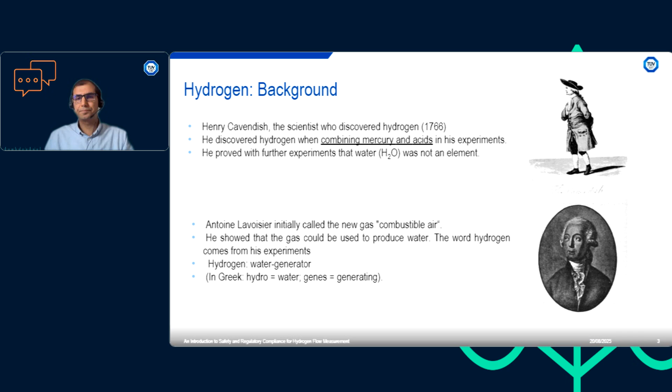So let's start and look at hydrogen properties, because it's really important to know the properties of hydrogen if we want to focus on its safety. Hydrogen is very similar to other small hydrocarbons like methane, butane, and propane. So all of these types of gas are combustible, they are odorless, they are non-toxic, and they are non-metallic.

When we come to safety concerns, all these types of gas cannot be detected by human senses. For example, if there is a leakage of hydrogen, we cannot smell it, as well as the leakage of methane, butane, or propane. The only thing is that with other types of gas, such as natural gas or methane or propane, they can easily add odorant to them. With hydrogen, it's actually difficult to add an odorant because hydrogen is very light and the odorant can get separated from the gas. So finding an odorant that can work with hydrogen is difficult.

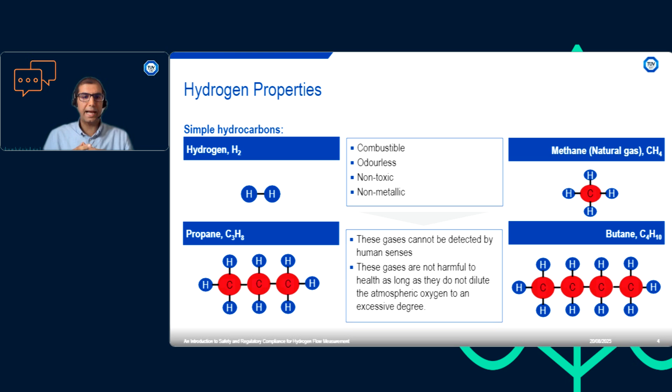And also these gases are not harmful to health as long as they don't dilute the oxygen in the atmosphere to a dangerous low level. Hydrogen is the smallest molecule in the universe. It has a very low viscosity. So because it has a low viscosity, it has a high leakage rate. So a system that is tight enough for other types of gas, such as natural gas, might not necessarily be tight enough for hydrogen.

So it is very important to test such a system with small atoms or a small molecule, something like helium. And hydrogen has a strong tendency to diffusion because of the small size of the molecule. So does it mean that we cannot store hydrogen? Well, that's not the case. We've been storing hydrogen for over 100 years. Normally some hydrogen diffuses through the walls of the storage system, but because the diffusion is insignificant, we don't lose that much hydrogen, and also outside of the boundaries of the system, the hydrogen is not to a concentration that can make an explosive mixture.

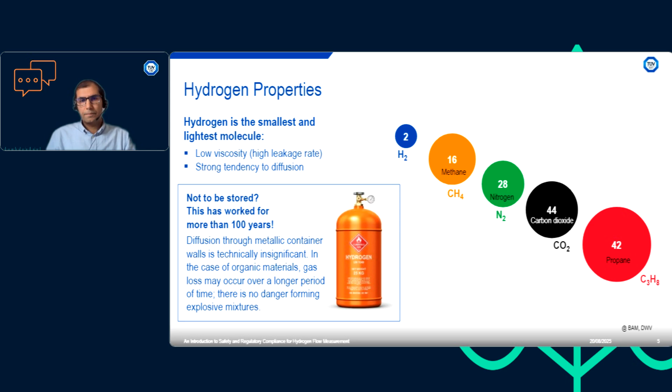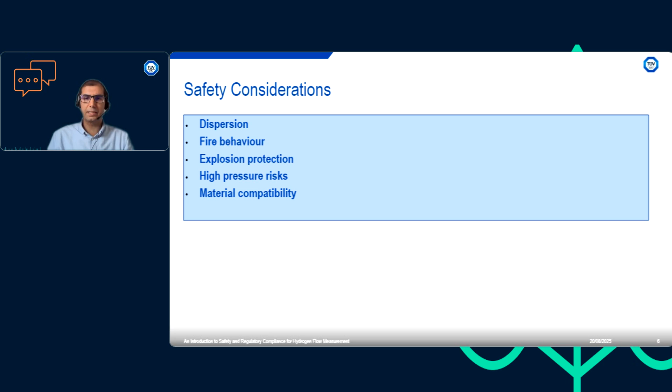Okay, let's move on to the safety considerations and some other behavior of hydrogen. So I will cover dispersion, fire behavior, explosion protection, high pressure risk, and material compatibility in the next section. The first question maybe is hydrogen explosive? Well, I can say yes and no. On its own, hydrogen is not categorized as an explosive substance because its molecules are stable.

But hydrogen, when it comes in contact with an oxidant, like the oxygen in the atmosphere, can make an explosive mixture. So this is the triangle of explosion or fire. We need to have three elements for a fire or an explosion to happen. We need the flammable gas, which is hydrogen. We need oxygen, and we need ignition energy. So even if one or two of these elements don't exist, there will be no explosion or no fire.

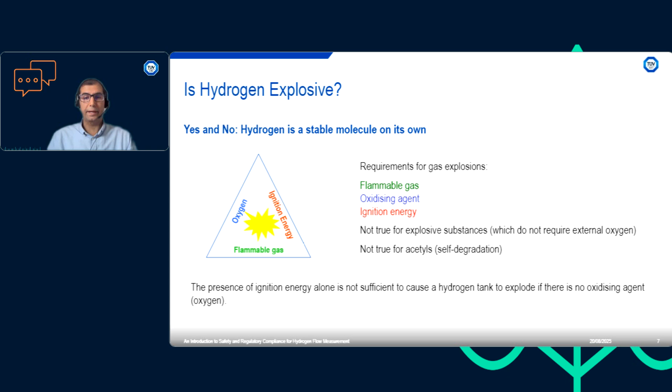So based on that concept, we can have measures in place to prevent any fire or any explosion. Protective measures normally are categorized under these three different levels: primary explosion protection, secondary explosion protection, and tertiary or constructive explosion protection. At the level of primary explosion protection, we normally try to prevent the formation of any explosive mixture. So examples of that are proper ventilation in your workplace, inerting of the system, and gas warning devices that should be in place. So that's the first step.

We always want to make sure that there is no leakage, there is no possibility of an explosive mixture to be formed, and if there is one, put proper measures to prevent the hydrogen from getting trapped there and reaching concentrations that are dangerous. So ventilation is actually very important for hydrogen. I will cover that more in the next slide.

Secondary explosion protection is the next step. That's when we make sure to avoid any ignition coming in contact with the possible explosive mixture that can be formed in our workplace. Examples of that are the classification of zones, ATEX devices, and lightning protection. So if you work in an environment where there is a possibility of the formation of an explosive mixture, you need to have those measures in place.

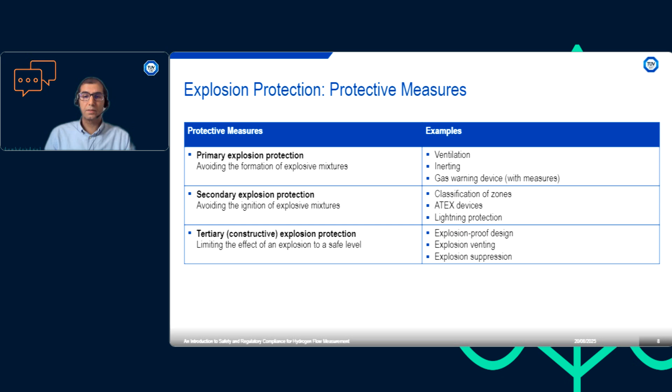And then finally, tertiary or constructive explosion protection is when we try to minimize the effect of a possible explosion. That can be explosion-proof design of the system, explosion venting, and explosion suppression. So in case there will be an explosion or fire, we want to minimize this damage. So that's basically the last step.

So let's take a look at hydrogen dispersion behavior. Ventilation is very important for hydrogen. I can say even more important than other types of flammable gas. Why? Because hydrogen is lighter than air. When you have a leakage of hydrogen in open air, it quickly rises and just escapes from the space around the leakage point because it's lighter than air.

So if we are in a confined area, the hydrogen that has leaked quickly rises and accumulates under the ceiling, and then if it has time, it diffuses downwards and makes a very dangerous atmosphere there. So if you have proper ventilation, it is very likely that hydrogen escapes easily.

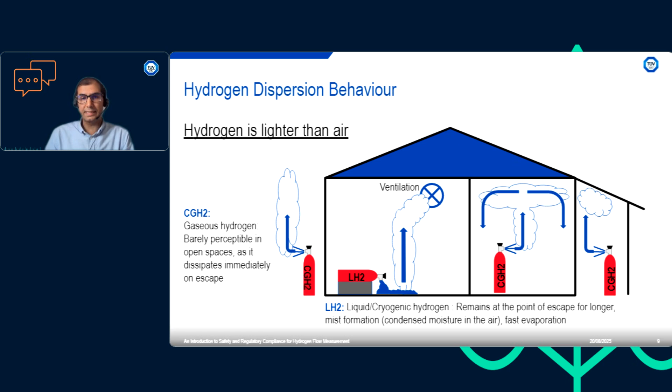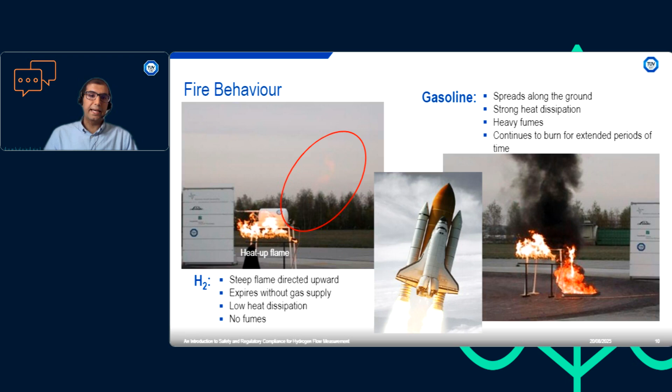So you can imagine that when we have a flame that cannot be seen, is hard to feel, and has no fumes that you can see, there are basically not many signs that you can see or feel that there is a flame in your environment. It can create a very dangerous environment because you can unintentionally get too close to the fire without knowing. So the flame is basically there in this red area.

Other characteristics of the fire behavior by hydrogen is maximum flame speed, which is approximately 8 times as hydrocarbon-based gases. So it means that if there is a fire, it spreads way faster, and then that increases the risk of detonation. That can cause chain reaction. So it can cause a rise in pressure and temperature over a wide area.

As I mentioned, it's barely visible and it has a low heat dissipation. That means we need to have proper flame detection instruments in place. So hydrogen flames cannot be seen, but they have higher levels of ultraviolet radiation. So what that means is that we can use ultraviolet imaging cameras, we can use thermal cameras, or we can use water mist to detect a hydrogen flame.

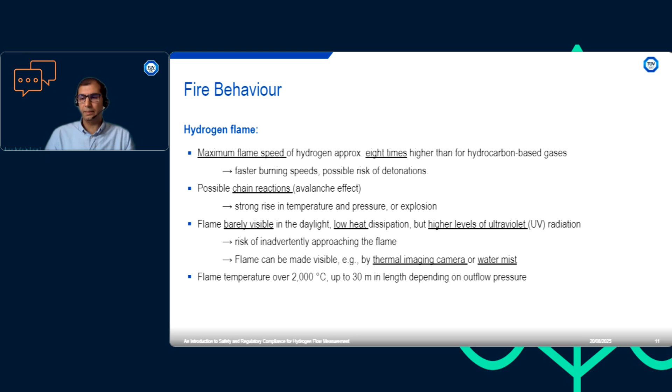I talked about its radiation being low. Does that mean that the flame is less dangerous than other types of flame? That's not the case. The flame temperature can go up to 2000 degrees Celsius, and the height can go up to 30 meters. So it is not less dangerous than any other type of flame.

So this is a picture of thermal imaging cameras, as you can see. On the right-hand side, we have a propane flame, and on the left side, hydrogen flame. So they can easily detect the flame.

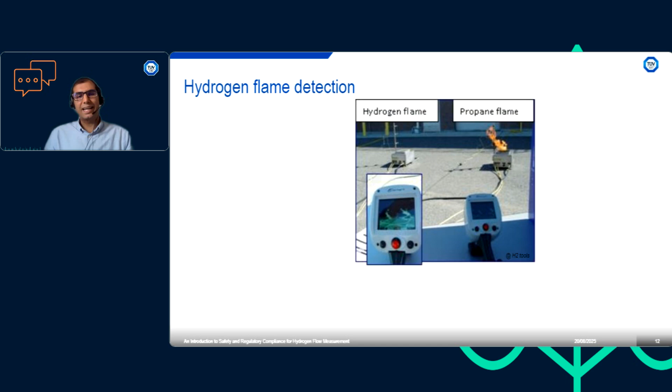Another way that you can use, and it has been mentioned in the ISO standard, is just using a straw broom. As you can see, it has even been mentioned in the international standard ISO 15916. So basically, if you suspect that there is fire in a place, what you can do is to just hold something like a straw broom in front of yourself, and then if it catches fire, that means there is fire there.

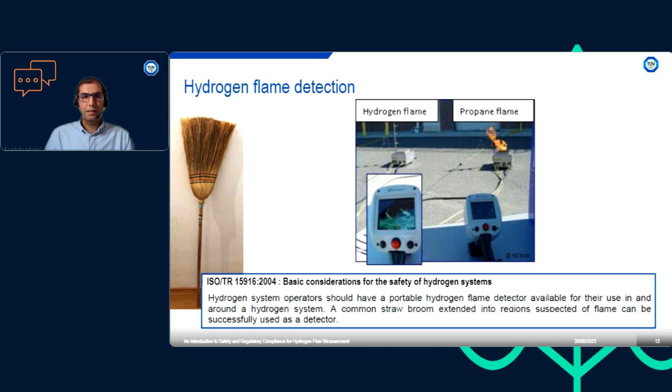The next slide is about the ignition limits of hydrogen and its comparison with methane and propane. The vertical axis is the ignition energy required, and the horizontal one is fuel concentration. We have an LEL, or lower explosion limit, and we have an upper explosion limit, or UEL. As you can see, the envelope for hydrogen is pretty large, while the envelopes for methane and propane are way smaller. However, the LEL for all of them is pretty similar.

So does that make hydrogen way more dangerous because its UEL is much higher than the other two types of gas? Well, that's not the case. Let me explain this for people who might not be familiar with this envelope. Inside this envelope is where a fire or an explosion can happen.

The LEL is basically the first point that we get to when we have a leakage of a flammable gas. For hydrogen, from 4% up to 75% hydrogen in the atmosphere, we can have a fire. For methane and propane, the LEL is very comparable. So because when there is a leakage we first get to the LEL, it doesn't really matter that the range is larger for hydrogen.

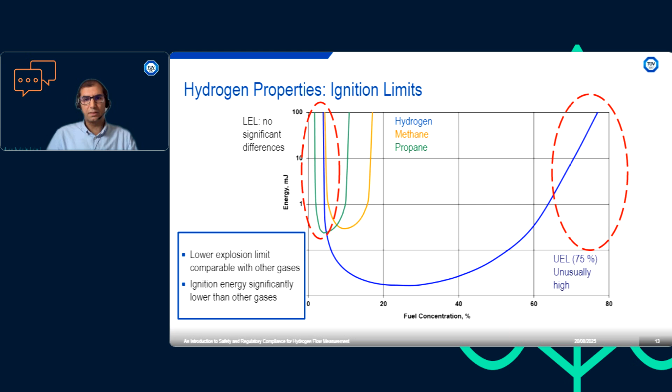Another characteristic of hydrogen, which is very different from these types of gas, is its Joule-Thomson effect. Hydrogen has a negative Joule-Thomson effect. What does that mean? For a gas like methane, or most types of gas, when we have a sudden expansion, the temperature of the gas drops. For hydrogen, around room temperature, it's actually the opposite.

So if there is a release of hydrogen and its pressure suddenly drops, its temperature actually rises. As an example, if its pressure drops from 200 bar to 1 bar, its temperature from room temperature can go up by 6 Kelvin. And this is not linear. So if the pressure drops from 700 bar to 1 bar, the temperature can rise over 50 Kelvin, which can be pretty dangerous.

The next slide shows a comparison between vapor pressure of hydrogen and methane, butane, and propane. As you can see, hydrogen has a small vapor pressure curve, and its critical point is below 50 Kelvin temperature. What that means is that it is not possible to liquefy hydrogen just by applying pressure at room temperature. So it is not liquefiable under pressure at room temperature.

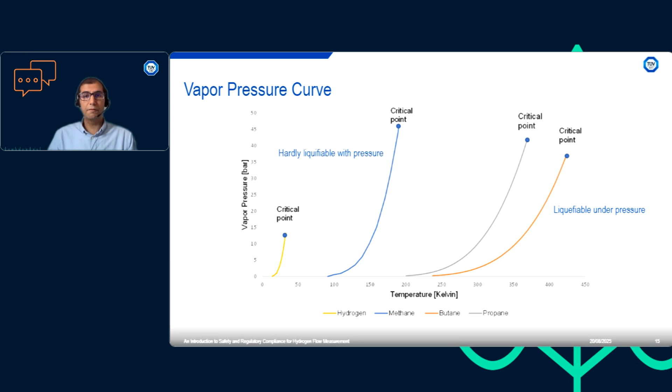So we need a very low temperature for hydrogen to make it liquid, and basically that's the only way that we can make it liquid. So we have to reduce its temperature to a very low temperature, which is, I think, minus 253 degrees Celsius. Yeah. So this is like a comparison between the boiling point of hydrogen and some other substances. So as you can see, hydrogen is even lower than oxygen and methane, and we need to get to that temperature to have liquid hydrogen.

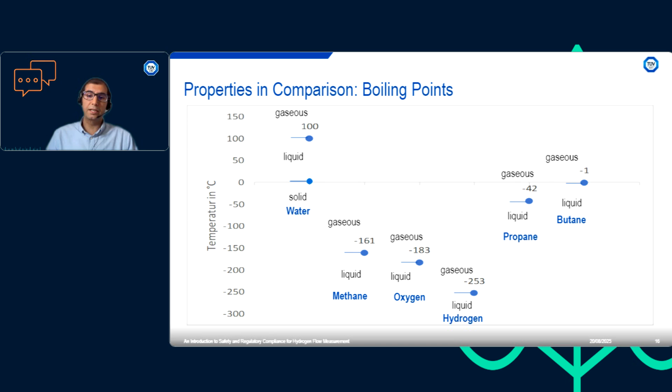So dealing with liquid hydrogen can be dangerous in terms of getting frostbite. So you should be careful with that and have enough safety measures in place if you are dealing with liquid hydrogen.

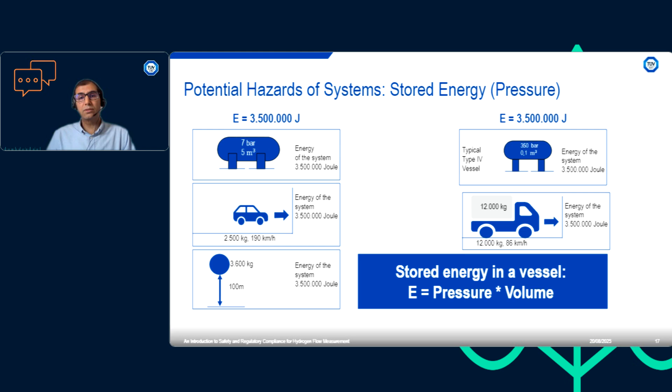Another safety concern with hydrogen is hydrogen embrittlement of materials. Hydrogen can cause embrittlement in 2 different ways. So the first way that it can cause it is when we are dealing with liquid hydrogen. Because it has such a low temperature, basically that temperature reduces the ductility of any material that comes in contact with that hydrogen. And then it can increase the risk of cracking and the failure of the material.

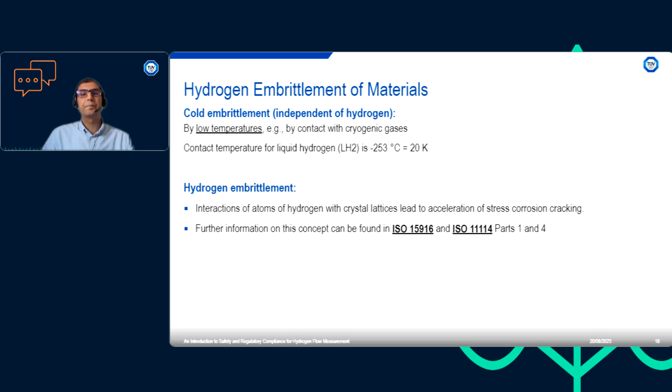So let's look at the mechanisms of hydrogen embrittlement. Hydrogen has two different faces. It has a molecular phase and it has an atomic or ionic phase. When hydrogen is in the form of molecules, it's basically uncritical. It doesn't do that much damage to any system. But when these molecules come in contact with the surface or the boundaries of the system, because of those interactions with the surface, the molecules can split into two ions. And these ions, because they are very small, can easily diffuse into the structure of the material.

So when they diffuse into the structure of the material, they can go between the atoms of the metal and then reduce the cohesion between metal atoms. That will cause ductility reduction in the metal, and then finally it can cause cracking in the metal and the material will fail quicker. So if you are using a system with hydrogen, it is more likely that your system or your system components fail quicker than if you are using the same system with, for example, natural gas.

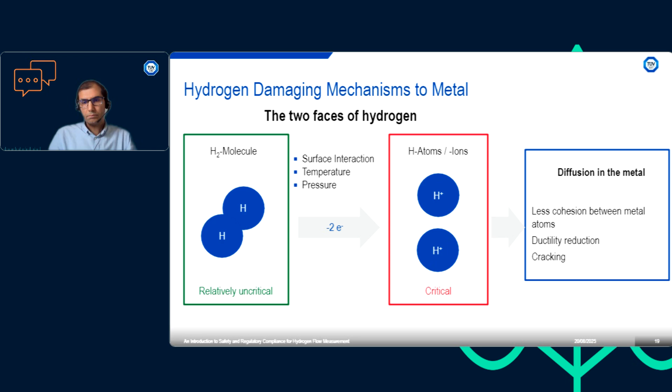So what is the effect of pressure and temperature on hydrogen embrittlement? Basically, if we have a higher pressure, we will have a higher hydrogen diffusion rate. So basically, it means more hydrogen will diffuse into the structure of the material and will cause more problems. So if your system works at a higher pressure, there is more risk of hydrogen embrittlement. For temperature, it is not as straightforward as that.

So at very low temperatures, materials have low ductility, so that increases the risk of embrittlement. But at the same time, because the temperature is low, hydrogen diffusion slows down as well. So that somehow balances the reduction in ductility.

At room temperature to moderate temperature, such as 300 degrees Celsius, that's the most dangerous range, basically, because hydrogen can diffuse very well at that temperature, and the ductility of the material is not as high as at higher temperatures. So that's the most dangerous zone for hydrogen embrittlement. And then at high temperatures, because the ductility of the material is higher, there is a lower risk. And also the hydrogen that diffuses into the structure of the material can escape easily.

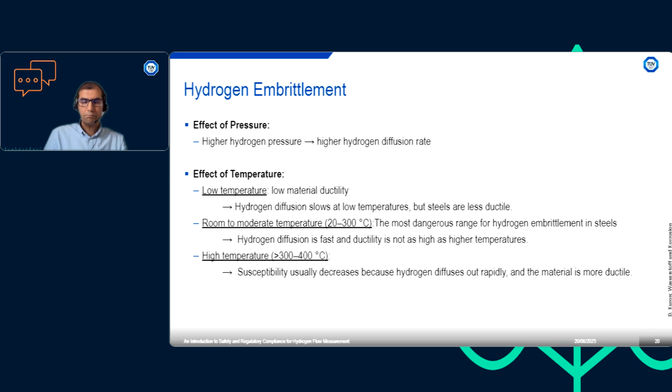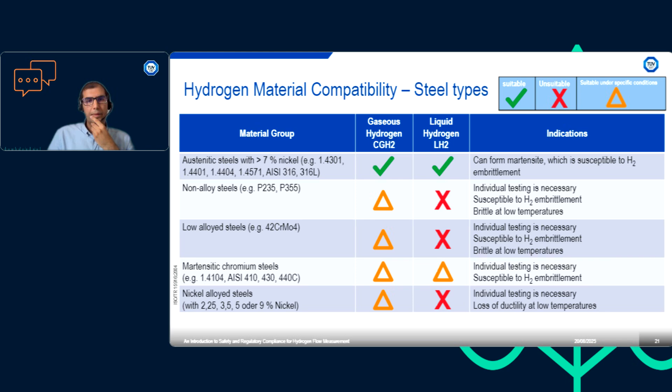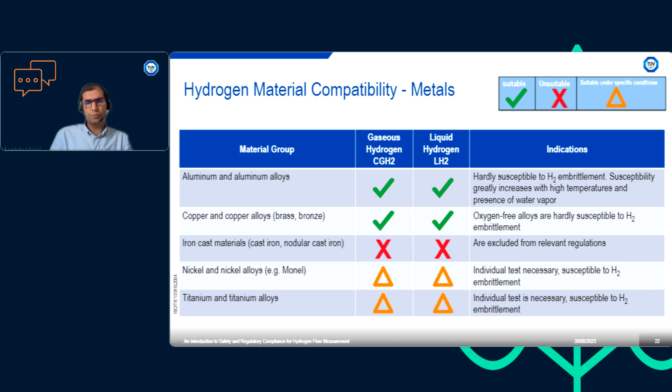So you can refer to this standard if you want to check different types of steel and whether they are suitable to be used with CGH2, compressed gaseous hydrogen, or liquid hydrogen LH2. And then also you can check different metals in the same standard. So as you can see, for example, aluminium and copper and their alloys are normally suitable to be used with hydrogen.

The other damage mechanism of hydrogen is high temperature hydrogen attack, or HTHA. This damage mechanism happens to just steel and happens at high temperatures above 178 degrees Celsius. What happens in this case is that, similar to hydrogen embrittlement, the molecules of hydrogen come in contact with the surface, they split into ions, and these ions diffuse into the structure of the steel. When they diffuse in the steel, they start a reaction with the carbon in the steel, and when they react with it, they make molecules of methane.

So two things basically happen at the same time. The first thing is that the steel decarbonizes and loses its strength, and at the same time, the molecules of methane will make bubbles inside of the structure and will apply some internal pressure to the material. So basically, it can cause cracking and the failure of the material.

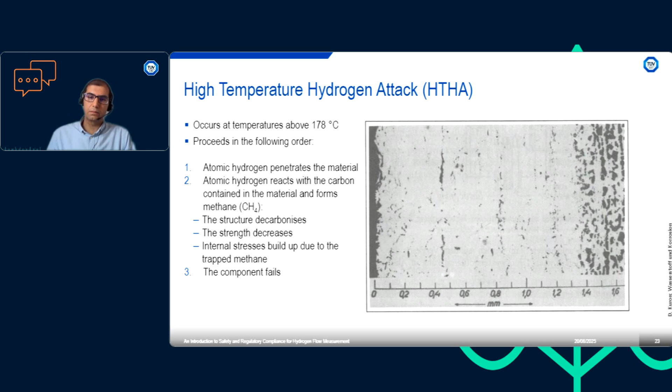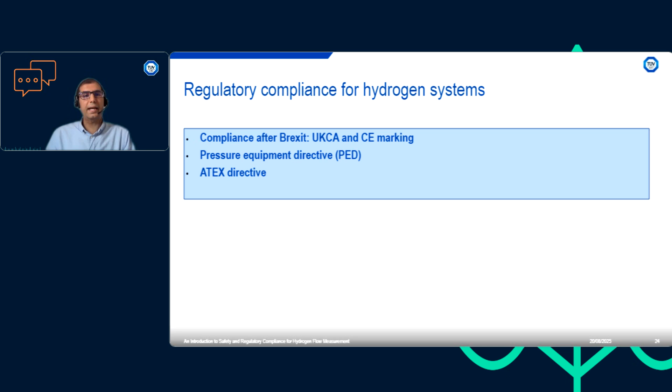Okay, the last part of this presentation is on regulatory compliance for hydrogen systems. So I will just very briefly cover the compliance after Brexit, UKCA and CE markings. Then I will cover two of the most important directives and regulation sets that are relevant to hydrogen systems, including flow measurement systems. They will be the Pressure Equipment Directive and the ATEX Directive that covers explosion protection.

In the UK, we have the British Standards Institution, or BSI. BSI is the national standards body and represents the UK in international standardization organizations such as ISO and CEN. However, BSI is not the regulator in the UK. The regulator in the UK is the Office for Product Safety and Standards, or OPSS, that works under the Department for Business and Trade. The responsibility of OPSS is to regulate all consumer products, except for some products such as vehicles, medicines, and food, that have their own regulators. And OPSS is the national regulator for legal metrology.

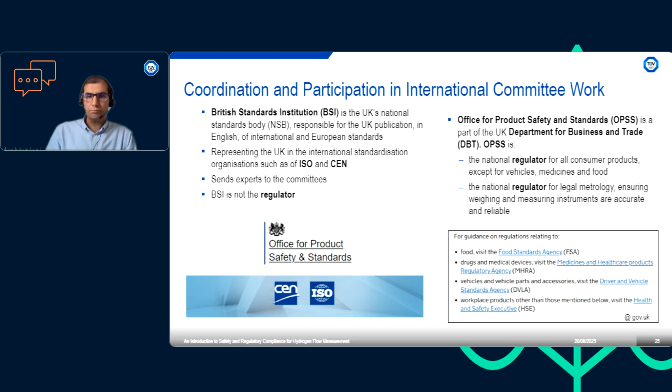For a product to be compliant with regulations, there are normally different sets of regulations at different levels. There are regulations at an international level, for example, the regulations from the United Nations. There are regulations at the European Union level, and then there are national regulations. So depending on where your product is, or where you want to put it on the market, that product needs to be compliant with those regulations.

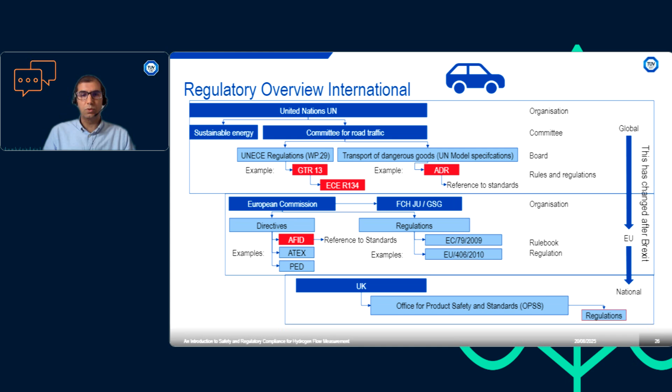So before Brexit, in the UK we had the European Union directives and regulations that we needed to comply with. But after Brexit, that has basically changed, and the UK doesn't need to follow those regulations anymore. So after Brexit, the UKCA marking has been introduced in the UK.

The marking in the European Union is called CE marking, and what that means is that when a product or a system that you have assembled receives CE marking, that system is compliant with all the required regulations that apply to that system. So if you can get that marking, your system is compliant and you can put your system on the market, for example. In the UK, after Brexit, UKCA marking was introduced, because before that, we just used CE marking.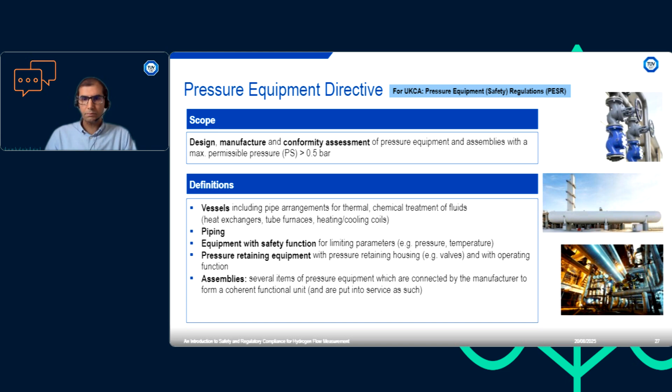And then after that, based on the category you fall under, you might need a notified body in Europe, as it is called, or in the UK, it is called a conformity assessment body. If you need it, there is a third party that needs to come and confirm that your product is compliant. And if you don't need it, you can just claim it yourself, and then you can receive the CE marking or the UKCA marking.

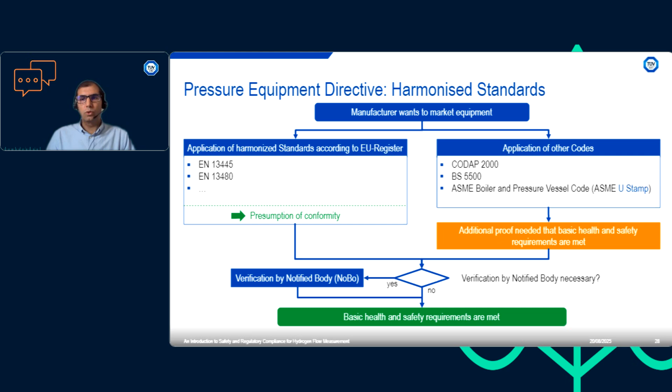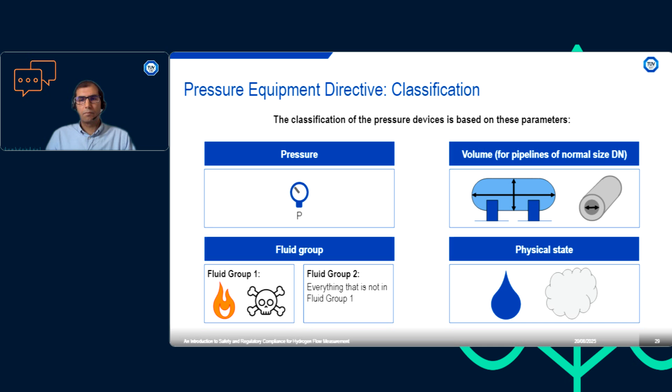The classification in the Pressure Equipment Directive is based on these four factors. So it's based on the pressure of your system, the volume of your system, or if it is a pipeline, the diameter, and the fluid group, which can be flammable and toxic, which is fluid group 1. So hydrogen will fall in fluid group 1 because it's flammable. Or fluid group 2, that is anything except the fluids in group 1. And then the physical state, that can be liquid or gas. So hydrogen, again, can be any of them. Based on those factors, you determine which diagram you need to use to determine the requirements for your system.

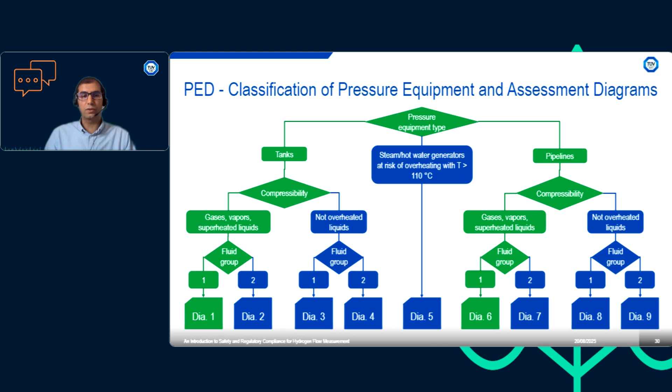So for example, if you have a tank, as you can see, a tank of hydrogen gas, let's assume that's compressed gas. And then the fluid group, as I mentioned, for hydrogen is 1. So on the left side, we get to diagram 1. If we think about a CGH2 vessel, for example, for such a system we need to refer to diagram 1 to see the requirements for that system and what we need to comply with.

So let me finish this. Based on the category that you determine here, you just go back to the Pressure Equipment Directive and read the requirements, and then you need to make sure that your system will comply with all those requirements. So if you fall in a higher category, you should comply with just that category. If you fall in a lower category, you can comply with the requirements of that category or any higher categories, because obviously their requirements are more thorough.

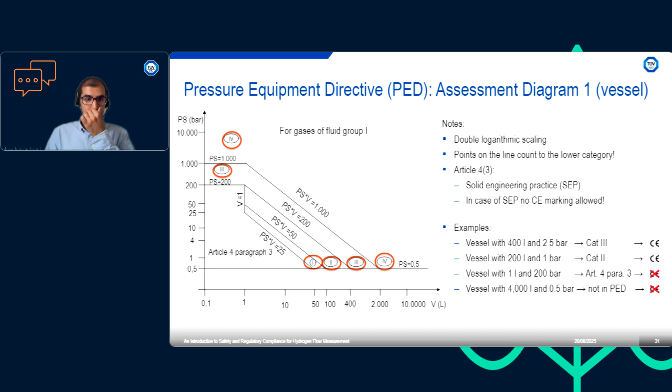The second directive that I'm going to cover briefly is the ATEX directive. This directive covers explosive zones and how we need to protect our environment from any explosion. So in Europe, it is two different sets of directives: the ATEX Directive 1999 that covers operation, such as design of explosion zones, and the ATEX Directive 2014 that covers the product or the nature of the explosive zones. In the UK, the equivalent set of regulations is the Explosive Atmosphere Regulations, or UKEX.

So ATEX basically determines different zones. I will talk about the zones more in the next slide. And then the requirements for the equipment that should be used in these zones, the equipment that is safe enough to be used in these zones, or the equipment that is not in the zones but basically works to make sure the required safety exists in the zone.

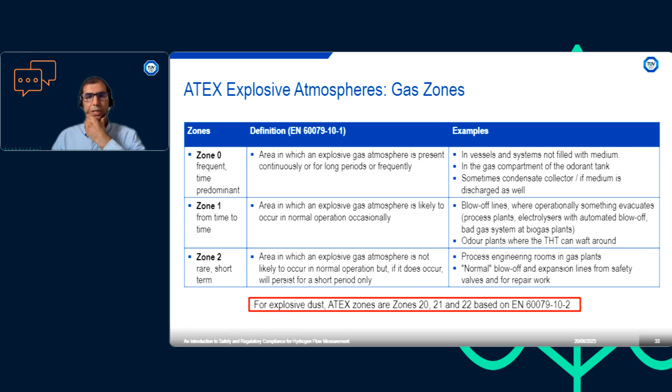So these zones are for flammable gas. We also have zones for explosive dust. The equivalent zones for explosive dust are zone 20, 21, and 22. Those don't apply to hydrogen, obviously. And they have another standard, as is mentioned below the table.

Just one thing that you need to keep in mind is that if you need equipment for zone 0, you can only use category 1. But if you are working in zone 1 and 2, you can use their own category, or you can use a safer category. So for zone 1, for example, you can use category 2 and category 1. For zone 2, you can use category 3, 2, and 1, but the opposite is not possible because the safety requirements will not be met.

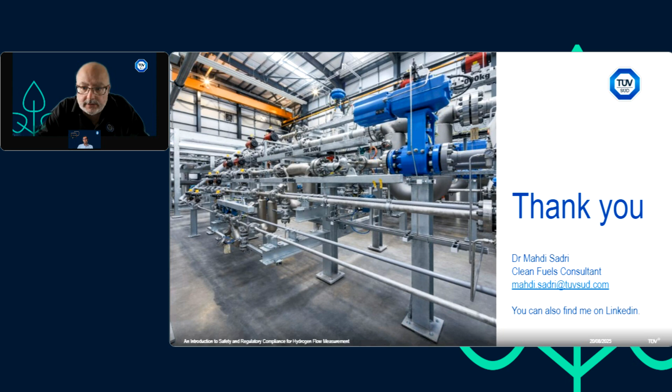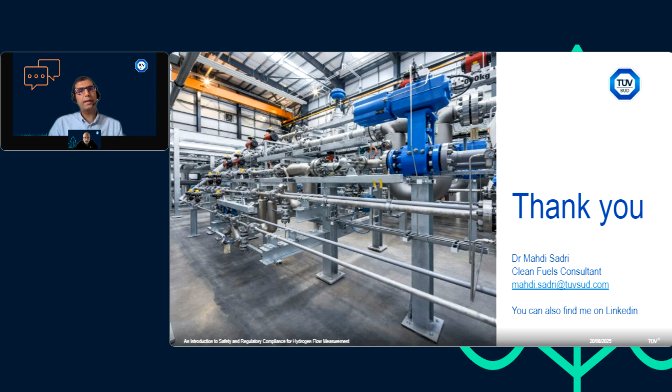Okay, first one. What's the biggest safety risk with hydrogen? I'd say the biggest safety risk is an undetected leakage. And also another thing that I mentioned in the presentation is an invisible flame. So it is very important with hydrogen to have proper equipment in place to detect a leakage, because as I mentioned, in many cases there is not a proper odorant to be used with hydrogen. So we can't sense it if there is a leakage.

So we need to have proper equipment in place, like gas detectors, for example, and proper ventilation, because hydrogen rises and it can easily escape from the building if there is proper ventilation in place.

Okay. Another question here on CE marking. How long will CE marking be valid in the UK? Good question. I think initially the plan was to introduce UKCA marking and have a transition time while all the regulations in the UK and the entire framework of UKCA are being written and prepared. And then after that transition time, the government was meant to only accept UKCA. And I think they started to do that.